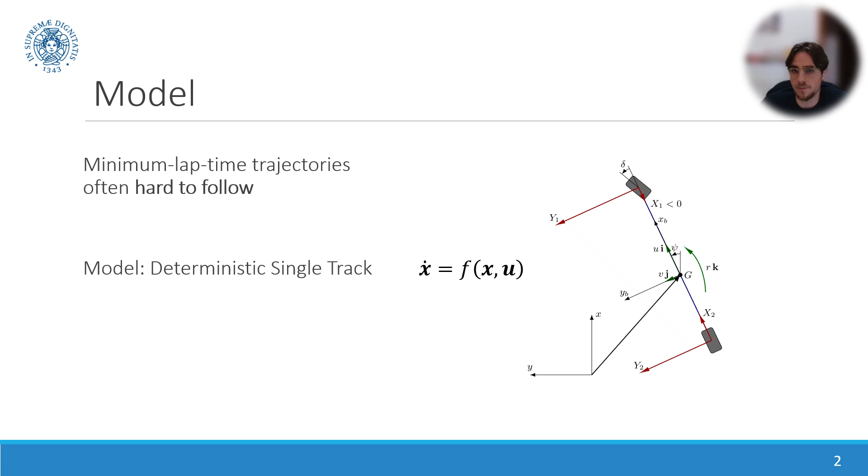The dynamic model we use for this study is a single-track model with nonlinear tire characteristic of Pacejka type. To represent uncertainty, we treat the disturbances acting on the vehicle as additive Gaussian process noise with zero mean and known covariance matrix that may depend on time. Under a first-order approximation, this allows us to describe the random state of the vehicle as a Gaussian distribution with a mean vector and a covariance matrix.

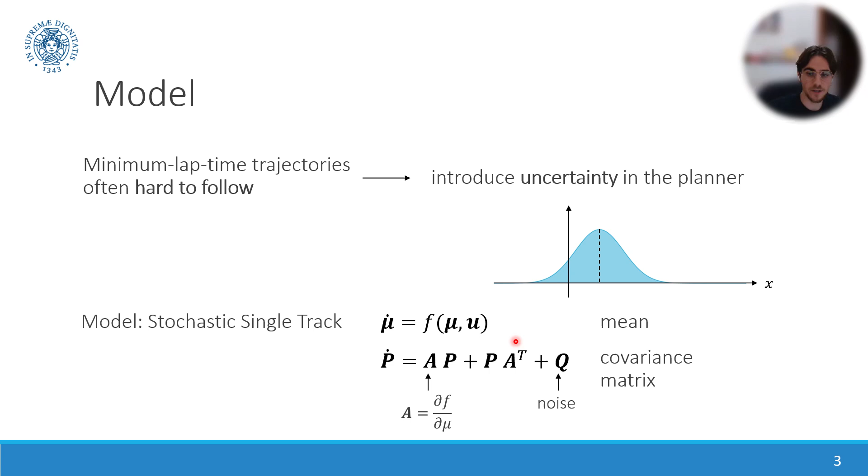The mean state follows the deterministic dynamics defined by the vehicle model, while the covariance matrix evolves according to a matrix differential equation driven by the Jacobian of the dynamics and by the disturbance covariance.

In our framework, safety constraints such as remaining inside the track boundaries or staying below the tire friction limits are not enforced deterministically, but instead they are required to hold with a given probability. By linearizing each constraint around the mean state and exploiting the Gaussian distribution, we can transform the chance constraint into a deterministic inequality that involves only the mean and the covariance. The result has the form of a nominal constraint evaluated at the mean state plus an additional backoff term that depends on the covariance.

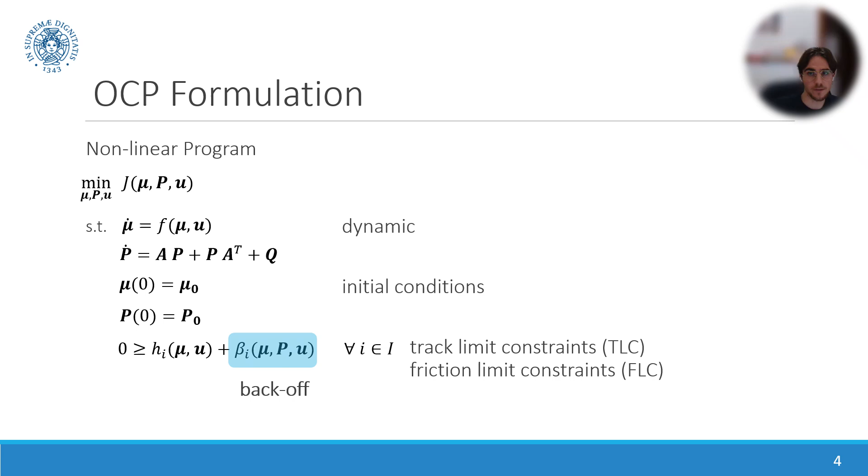The two key constraints are friction limits monitored via axial saturation ratio S at the friction ellipse and track limits monitored via lateral deviation E from the center line. Both use covariance-based backoffs that shrink the feasible region. The figures show the original constraint bounds with the gray shaded area representing the available region when the backoff is applied.

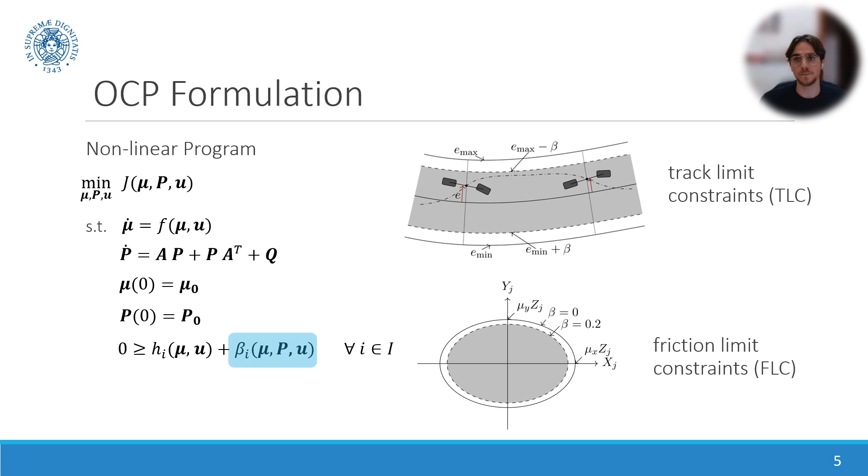This backoff is given by a coefficient gamma multiplied by the standard deviation of the linearized constraint, where gamma is the quantile associated with the desired confidence level P of a standard normal distribution. In practice, gamma becomes a tuning knob for the safety level. For example, gamma equal to 3 corresponds to about 99% probability. Larger gamma or larger covariance produce larger backoffs, which in turn yield safer but more conservative trajectories.

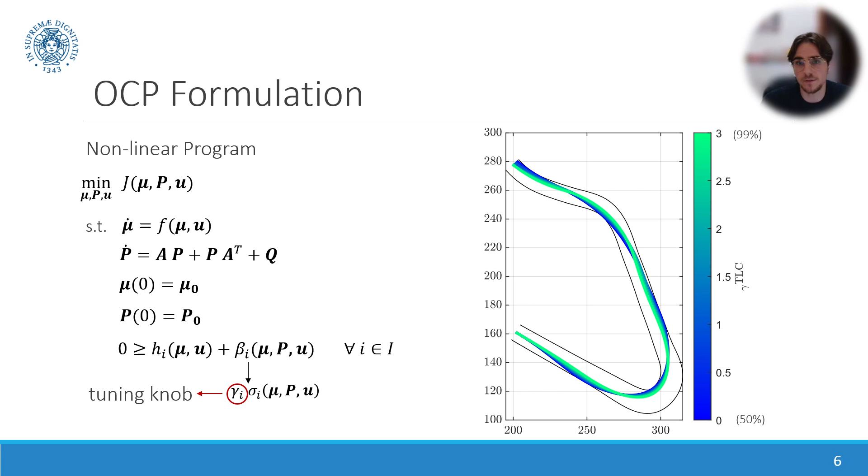The first planning strategy we propose is an open-loop, horizon-based covariance propagation method. We work on a spatial grid along the track, and at each grid point we propagate the covariance forward for a finite number of steps h without considering feedback.

Specifically, at a given grid point k, we have a fresh covariance P_k0 in red that is newly initialized with a nominal initial covariance and a most propagated covariance P_kh that has been advanced over h steps starting from an earlier point. When enforcing the robust constraints at grid point k, we use this most propagated covariance P_kh in green to compute the backoff terms.

This corresponds to a conservative worst-case view in which the disturbances are allowed to grow freely for h steps before any corrective action takes place. The design parameter h can be interpreted as the time window over which the driver or controller is essentially open loop before reacting to disturbances.

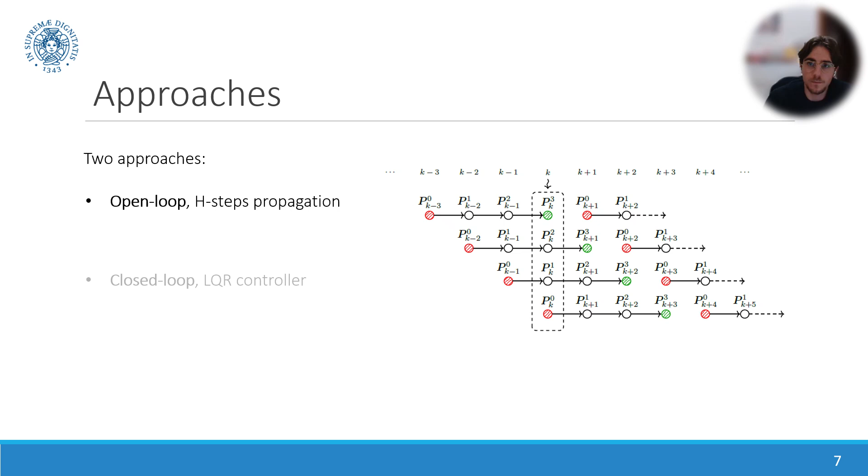The second planning strategy is a closed-loop covariance-aware method that explicitly incorporates a feedback policy designed to mimic the behavior of an expert driver. This approach is structured in 3 steps. In the first step, we compute a nominal deterministic minimum time trajectory using the standard, not robust, optimal control problem. The output is a reference path and control profile that ignore disturbances but serve as a baseline.

In the second step, we design a discrete time linear quadratic regulator around this nominal trajectory. This feedback law approximates how an experienced driver or an advanced controller will react in order to track the nominal trajectory. In the third step, we reintroduce the stochastic framework and formulate a new robust planning problem in which we jointly optimize the mean trajectory and the feedback gains.

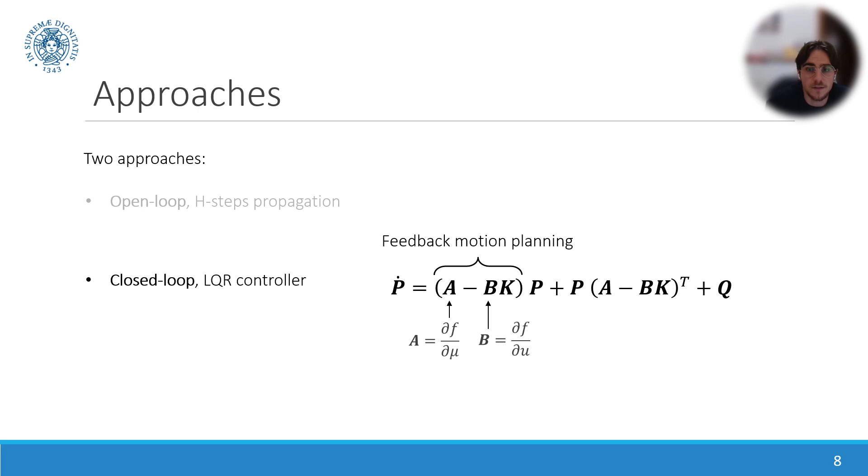In this problem, we propagate the covariance under the closed-loop dynamics, that is, using the linearized system matrix A minus BK, and we enforce probabilistic constraints using the resulting closed-loop covariance. We denote TLC a trajectory with robust track limit constraints and FLC a trajectory with robust friction limit constraints.

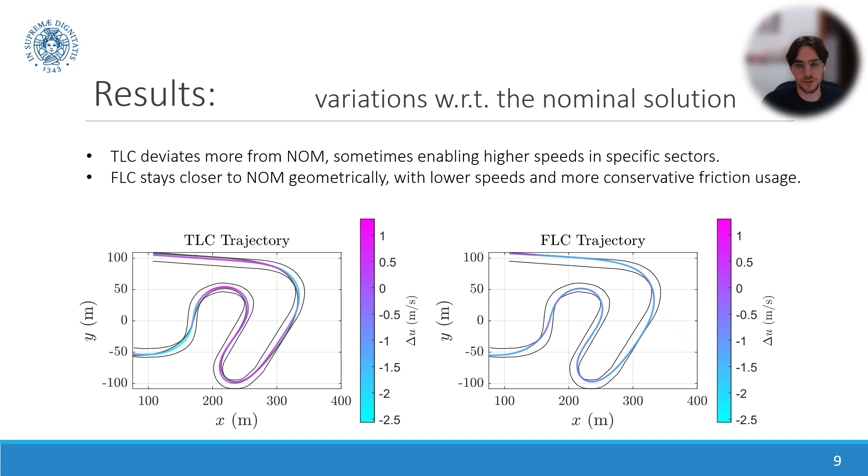To empirically validate the benefits of the robust planning approach, we simulate the controlled vehicle under random disturbances. We perform 100 simulations with random initial conditions and Gaussian noise realizations, using the same covariance matrices for the initial state and for the process noise as those employed in the planning phase. We then compare 2 scenarios. In the first one, an LQR controller tracks the nominal, non-robust minimum time trajectory. In the second one, a controller tracks a robust trajectory obtained with the closed-loop planning method.

When tracking the nominal trajectory, many of the simulated paths violate the track limit constraints, particularly in the more demanding parts of the sector. In contrast, when tracking the closed-loop robust trajectory, almost all simulated paths remain within the tightened track boundaries. This demonstrates that the probabilistic backoffs computed during planning translate into significantly fewer constraint violations in closed-loop operation, confirming the effectiveness of the proposed approach under realistic disturbances.

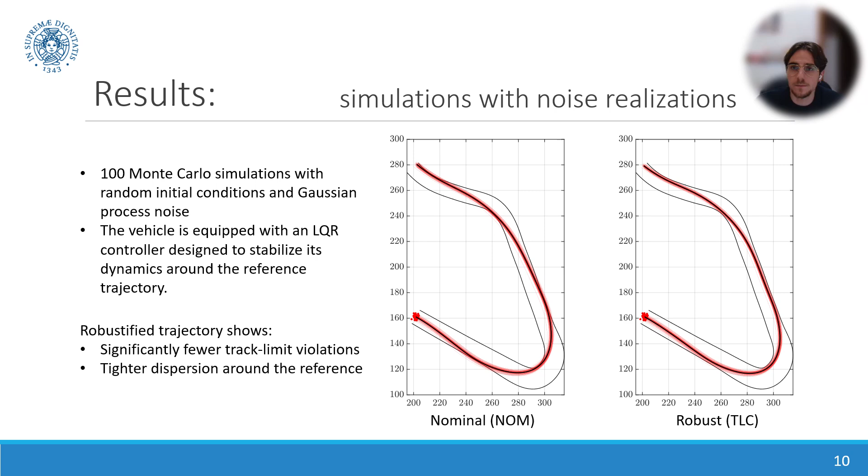We test 2 professional drivers. One, labeled VP, has Formula SAE and sim racing experience. The other, MM, has a rally background and is overall more experienced in high-performance driving. The simulator rendered a high-performance car on the Cartodromo di Siena circuit, scaled by a factor of 2 to match the vehicle dimensions. We used a 1 meter wide racing ribbon overlaid on the virtual roadway. The ribbon center line corresponds to the planned trajectory.

We tested 4 scenarios, 3 reference-guided conditions, NOM, TLC, and FLC, plus the non-ref baseline with free driving. For the disturbance-aware planning, we use a finite horizon of h equal to 4 steps to propagate state uncertainty, and a safety factor gamma equal to 3, corresponding to approximately 99% constraint satisfaction confidence.

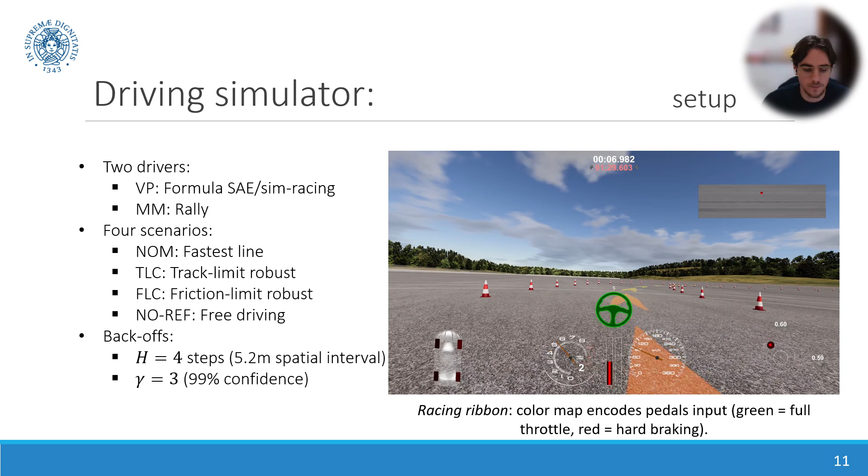To evaluate the results, we focused on a set of performance and style metrics. The primary performance metric is lap time in seconds computed over valid laps. To quantify steering workload, we introduce what we call steer energy, the integral over time of the squared steering wheel rate. Intuitively, higher values of this metric correspond to more intense steering activity and therefore higher physical effort. We also use several root mean square quantities.

For tracking fidelity, we consider the root mean square of lateral position error with respect to the active reference and the root mean square of the speed error. These capture how faithfully the drivers follow the planned line and the speed profile. For style indicators, we look at the RMS of the driver's side slip and compare it with the RMS of the side slip implied by the reference trajectory. And we also monitor the RMS of steering wheel rate as a quality proxy for steering energy.

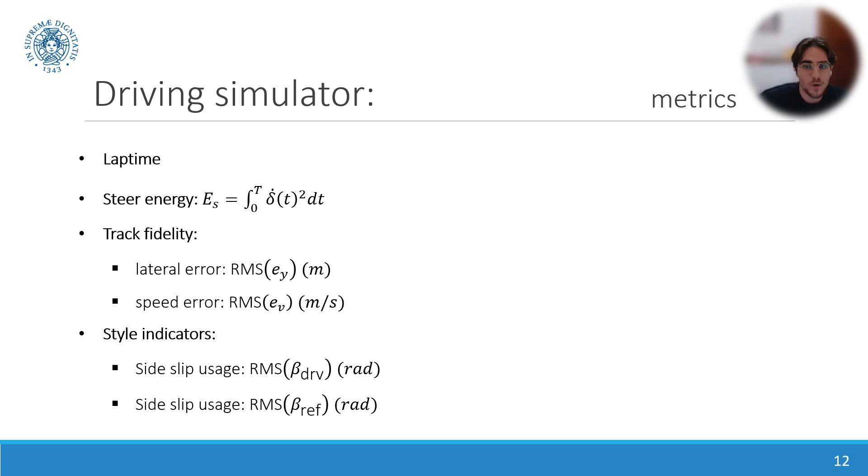Turning to steering effort, the steer energy figure is plotted on a logarithmic vertical axis to make differences more visible. Here, NOM and NOREF occupy the top of the plot, indicating the highest steering workload. In other words, driving either under a purely time-optimal reference or with no reference at all forces the drivers to work hardest at the steering wheel.

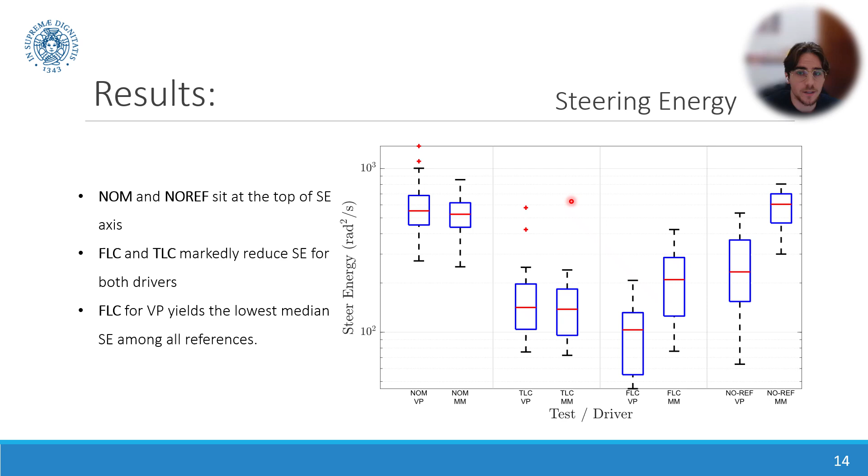In contrast, both FLC and TLC achieve a marked reduction in steering effort for both drivers. For VP, FLC yields the lowest median steer energy among the reference following conditions, while TLC is also much lower than NOM. For the other driver, the ordering is roughly TLC, then FLC, then NOM, with substantial drops in median steer energy when moving from NOM to the robust references. The key point is that robustness-oriented planning, especially FLC, can reduce steering effort dramatically.

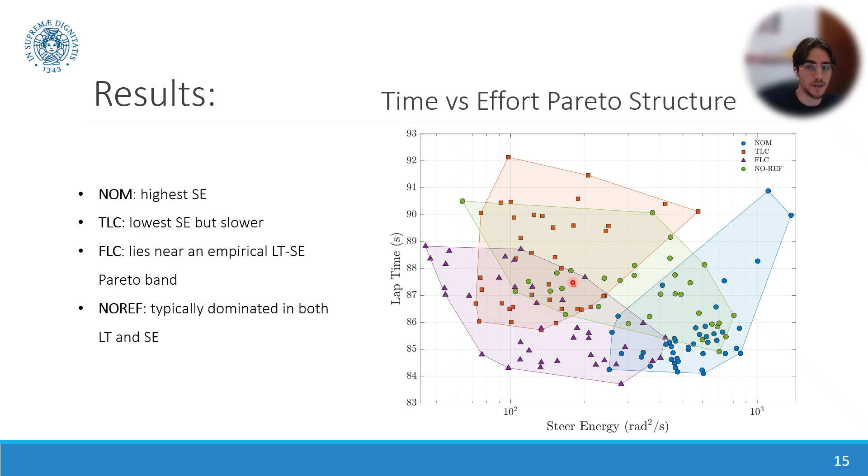The lap time versus steer energy scatter plots make the trade-offs even clearer. In the overall scatter, points associated with NOM cluster along the lower edge of lap time, but sit high in steer energy. TLC points sit further up, with longer lap times but also lower in steer energy. FLC points form an elongated band that lies near an empirical Pareto front. They offer reduced steering effort for lap times that are close to those of NOM.

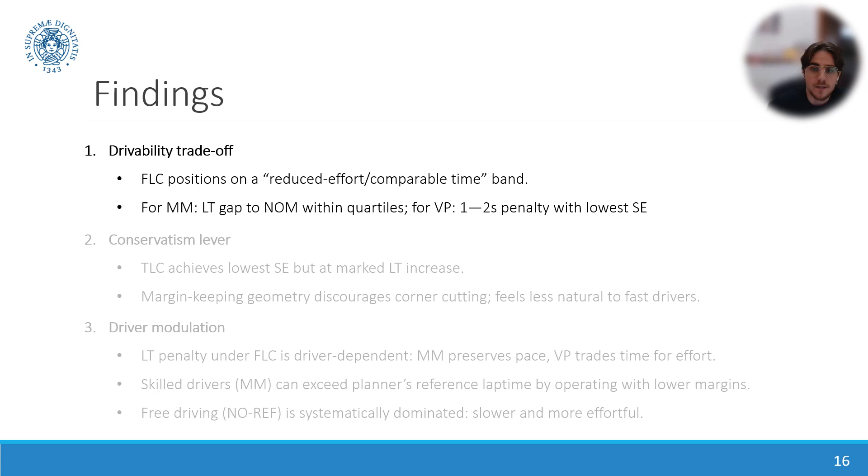First, we observe a clear drivability trade-off. FLC positions itself on what we might call a reduced effort comparable time band. For one driver, the lap time gap to NOM falls within the interquartile range of the NOM distribution, meaning it is statistically indistinguishable from the nominal benchmark. For driver VP, there is a penalty of about 1 to 2 seconds, but this comes with the lowest steering energy among all reference following conditions. Although our sample sizes are modest and these results should be considered preliminary, the trend is consistent and encouraging. FLC appears to offer a favorable compromise.

Second, we find that robustness tuning acts as a conservatism lever. TLC achieves the lowest steering energy in several configurations, but at the cost of a marked increase in lap time. Its margin-keeping geometry discouraged the decisive corner cutting that racing drivers naturally prefer, lengthening paths and depressing apex speeds. Subjectively, drivers reported that TLC trajectories feel less natural to execute, even though they require less corrective steering. This suggests that while TLC is effective at reducing workload, it might be too conservative for contexts where the lap time is the primary objective.

Third, we observed strong driver modulation effects. The lap time penalty under FLC is driver dependent. The more experienced driver preserves pace and in some cases even exceeds the planner's reference lap time by operating with lower margins than those assumed during calibration. VP, on the other hand, trades time for effort, accepting a slightly slower pace in exchange for reduced steering workload. This indicates that skilled drivers can exploit residual margins in their robust references, whereas less experienced drivers benefit more from the stabilizing guidance. Moreover, free driving under NOREF is systematically dominated for both drivers. It is slower and more effortful than reference guided driving, reinforcing the value of the structured trajectory planning.